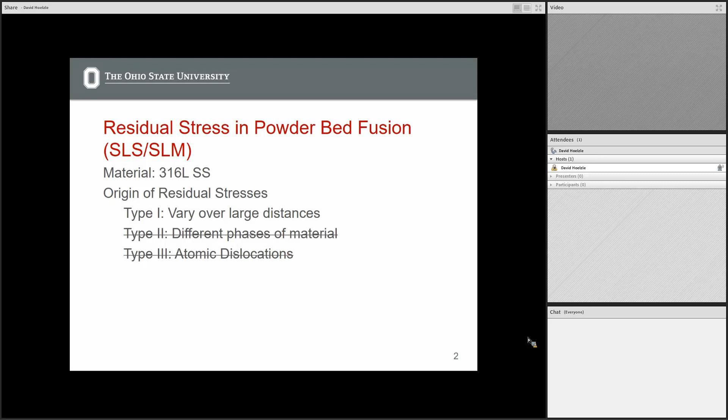So residual stress in relation to your final part—you're going to get a deformation from your intended shape, which is definitely an issue if you're going for a near net shape or net shape process, and you're expecting that your part is going to meet a certain amount of tolerances when it's actually done printing.

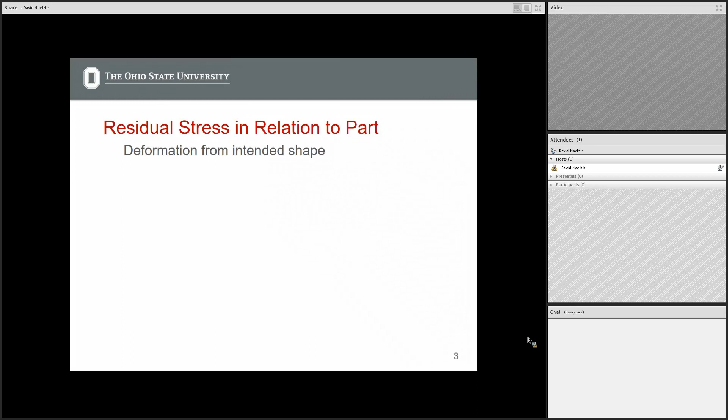And a tensile pre-stress can actually add to the external loading stress on a part itself, which will reduce its strength and also favors crack propagation if a crack were to form when you loaded your part.

They did bring up examples about how this pre-stressing can be used to actually change the material properties favorably for a part, in particular with ceramics and glass, but they really mainly wanted to focus on reducing this tensile pre-stress.

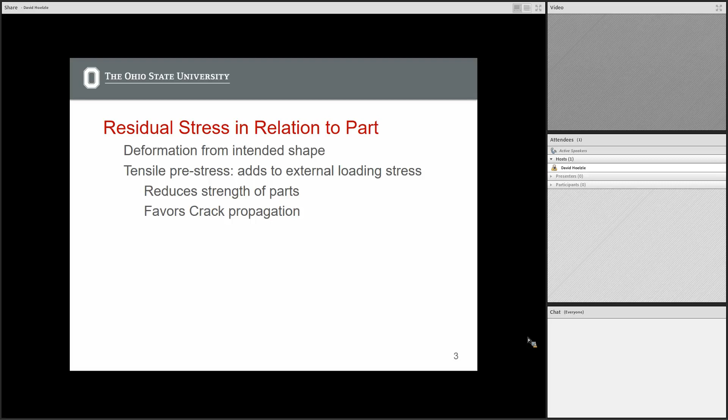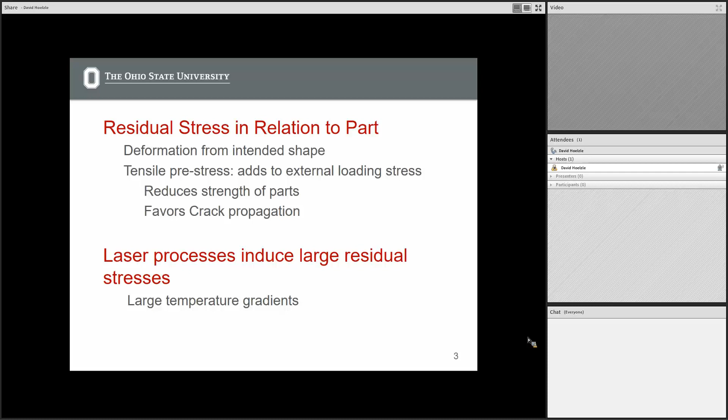So it was well known before this paper that laser processes do apply a residual stress to your part itself. In fact, these large temperature gradients were used for a process known as laser bending, which is using the laser to actually bend sheet metal to a required shape.

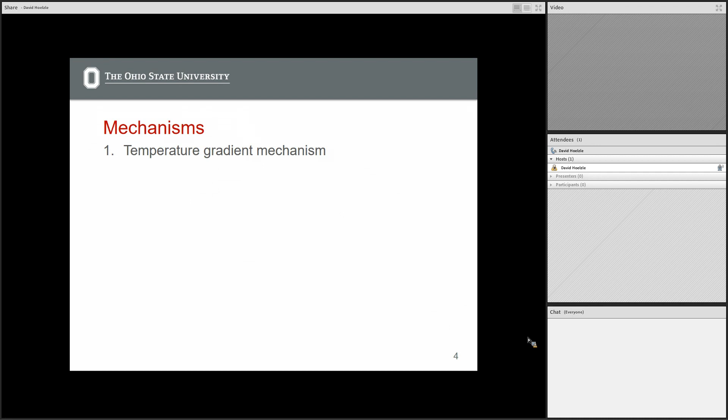So the mechanisms that they talk about that actually apply this pre-stress—there were two. We have the temperature gradient mechanism, which they describe using this figure here. The way this mechanism works is that a large thermal gradient begins to develop around the laser as you have a lot of energy heating the surface, but relatively slow conduction of heat through the part. So that's going to cause a decrease in strength of the part in that area.

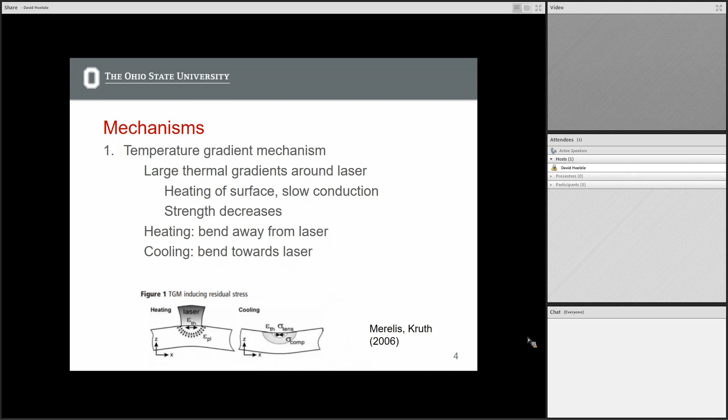So when you're heating, you're going to get a bend away from the laser, and then once that material begins to cool, once you remove the laser source, you're going to begin to get a bend towards the laser direction. However, the main one they wanted to focus on in their theoretical model was the cool down phase of the molten top layers.

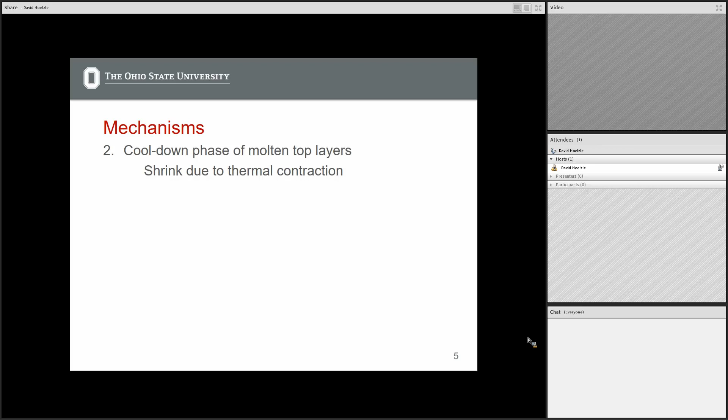So what that ended up meaning was the molten top layer wants to shrink due to thermal contraction. However, it's going to be inhibited by the underlying material that it's fused to that isn't molten.

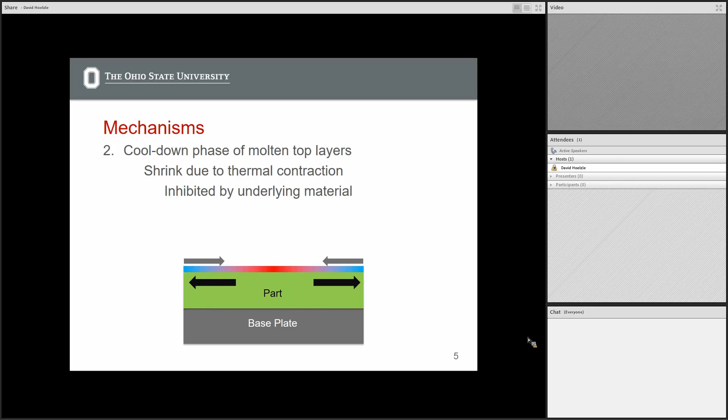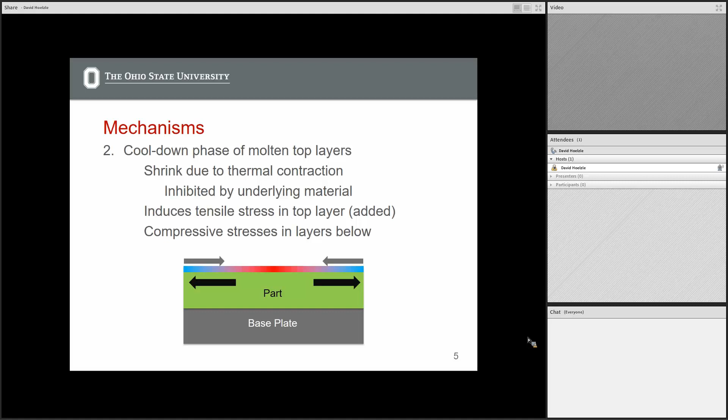So a visual to help explain this: if we have our base plate and our part that we've already built up here, we're going to add a molten top layer to this part. As it begins to cool, it's going to want to thermally contract. However, because it's fused to that part below, it's going to be unable to do so. And this is going to induce a tensile stress in that top layer, while also applying a compressive stress to the layers below. Now this is going to be important to explain a figure a little later on.

So the model that they ended up building had a few assumptions and a few definitions for their mathematical equations. First, we are concerned with the base plate height, for reasons that I'll go into in a little bit. We also need to be concerned with the part height and our layer height that we're going to be adding.

We're going to assume that the base plate and the part are both at room temperature, and that the upper layer induces this thermal stress due to shrinkage, equal to the yield stress of the material. We're also going to say that the stress we're concerned with is independent of the thickness, or the y direction, of our part.

So we're going to be concerned with a 2D model that has coordinates in the z direction, which is the build direction, and the x direction, which is along the length of the part. We're going to assume that general beam theory is valid, and there's going to be no external forces on the part and base plate combination.

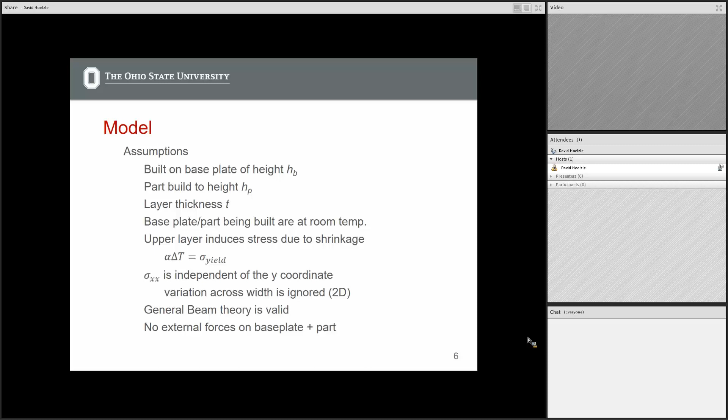So the model was constructed using a force balance equation and a moment balance equation. They also applied a continuity of deformation between the base plate and the part itself, using the strain equation AZ plus B. It wasn't explicitly stated, but based on how they go from these equations to their final model equations, we're also going to be applying Hooke's law, stress equals Young's modulus multiplied by strain.

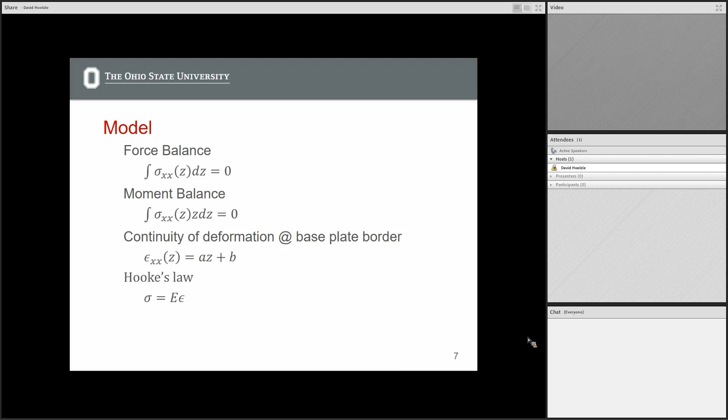Taking a look at what happens at that interface, we're going to have the same deformation of the base plate and the part itself. However, those two materials have different stiffnesses, so they're going to develop different stresses. We can define a ratio M here, which compares the stiffness of the base plate and the part itself.

Applying Hooke's equation and the strain equation we just showed, we end up getting our force and moment equations to look like this, where we have an integral across the base plate, an integral across the part, and then an integral across that top layer.

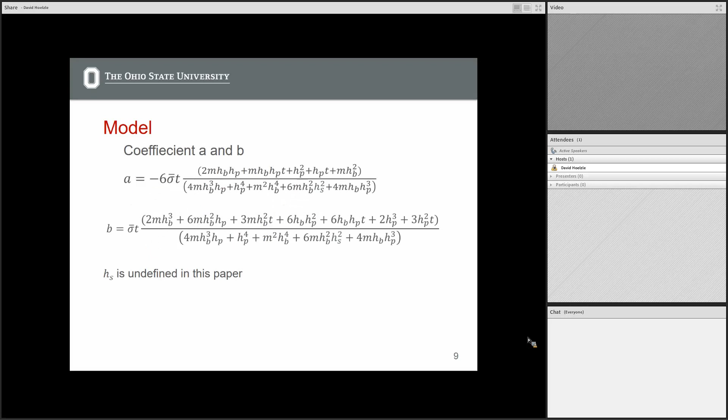That's good if we're only concerned with the residual stress that builds up if we keep our part attached to our base plate for an infinite amount of time. But we're more interested in what that part's going to be after we actually remove it from the base plate. To do so, we take a look at this relaxation stress, now in a new coordinate frame, Z prime, which is related to the height of the part after base plate removal using a wire EDM process.

We're going to have a constant shrinkage of the part due to thermal shrinkage, uniform across the part. Does everyone know what wire EDM is? It looks like you're a little fuzzy on it.

Basically, it's an electrochemical way of removing material, or separating the part from the base plate, without inducing or relieving stress in the part. If you were to remove the part by, say, a bandsaw, the vibrations of the bandsaw can actually relieve stress in the part, and therefore the measurement you did afterwards would be fictitious compared to what actually was in the part. So it's essentially seen as a zero stress way to remove material.

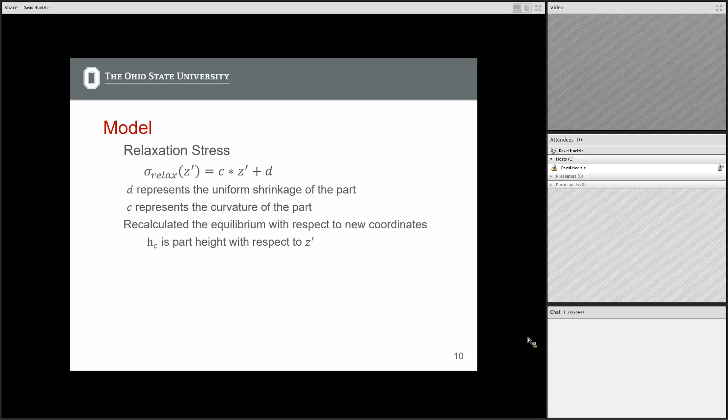That's going to be important for the method they use to experimentally test the residual stress built up across the part thickness. Going back to the relaxation stress model, we're going to have a uniform shrinkage of the part and also a deformation or curvature of the part itself. We can solve those two parameters using this equation, which goes back to the force and moment balance.

Getting into their actual model results, they began with 50 layers and a base plate of 20 millimeters. That's going to be important because they vary the base plate thickness in some of their results, which affects the residual stress. Their base plate was stiffer than the actual part material they were printing. They used a layer of 50 micrometers, and the sigma yield, important for the graphs, is 300 megapascals.

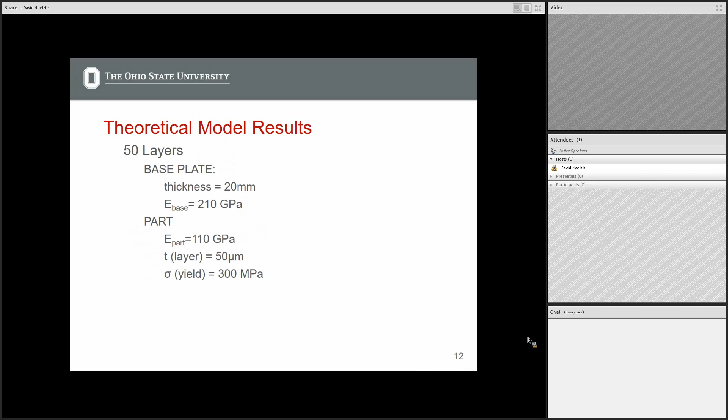So just to help orient you to the figures that we're going to be showing, if we print a material layer on this base plate, we're going to get a compressive stress in the top layer of that base plate and a tensile stress towards the bottom of that base plate.

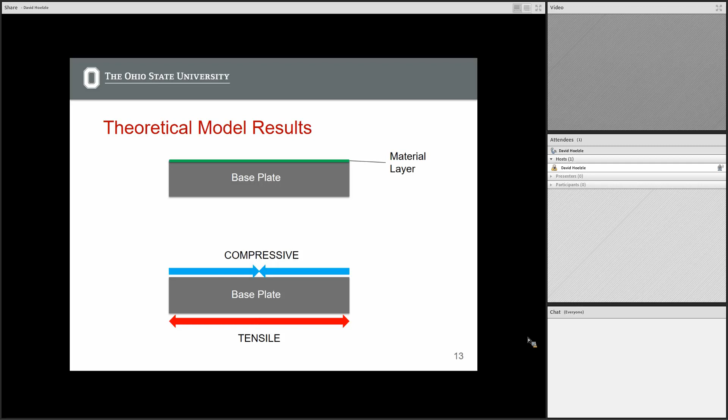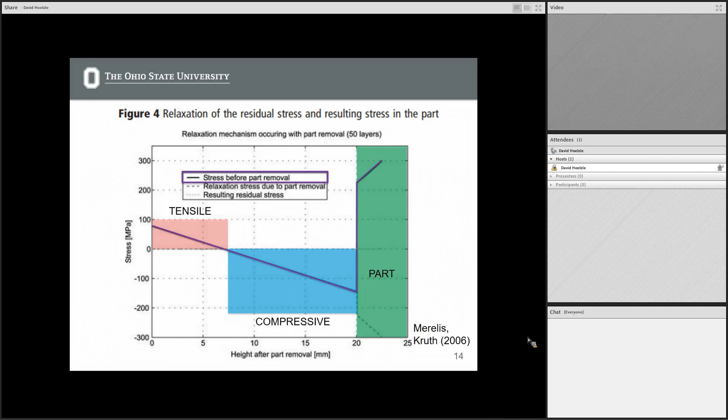So we have our tensile stress zone that we just showed with that figure before. Here, our compressive stress zone, and this is the stress going from the bottom of the base plate all the way up through the top of the part. One important thing to note here is that this is our yield stress, through that assumption that we applied at the very beginning that the uniform shrinkage is going to cause yield stress in the top layer of the part.

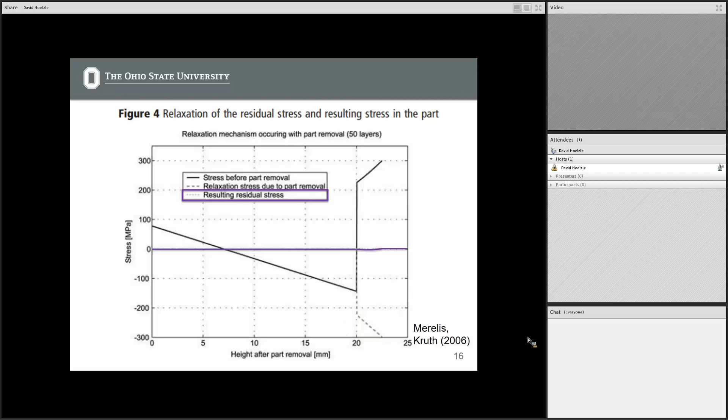So then this is our relaxation mechanism that we just showed the equation for. We're going to have our uniform shrinkage and then our bending. And then this is going to be the resulting stress after we actually cut the part off of the base plate itself. Now this looks like a pretty much horizontal line. I tried to highlight that little tiny dip right there. But blowing that up, this is what that's going to look like.

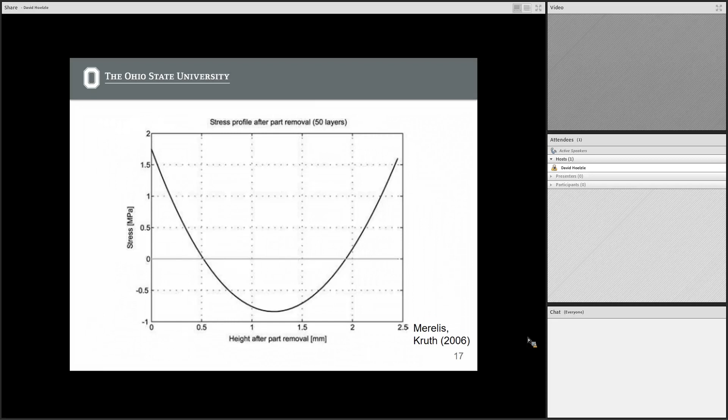You can see that we get a really big decrease in overall residual stress from the part being on the base plate itself. And we get two distinct zones at either end of the part of tensile stress, and in the middle we have a broader compressive stress zone. Also, the endpoints aren't actually at the exact same stress level. The maximum stress comes at the section of the part that's towards the base plate itself.

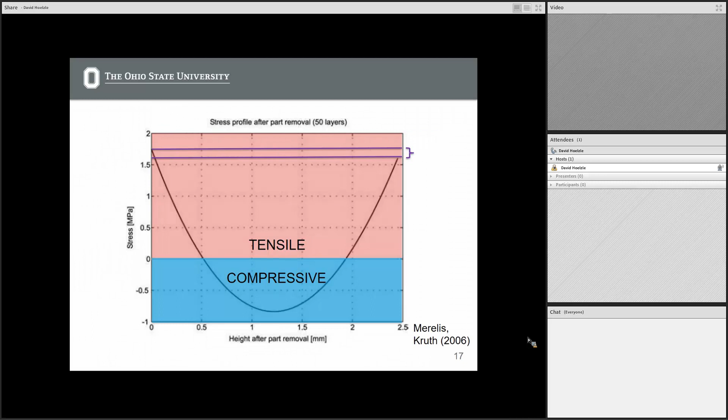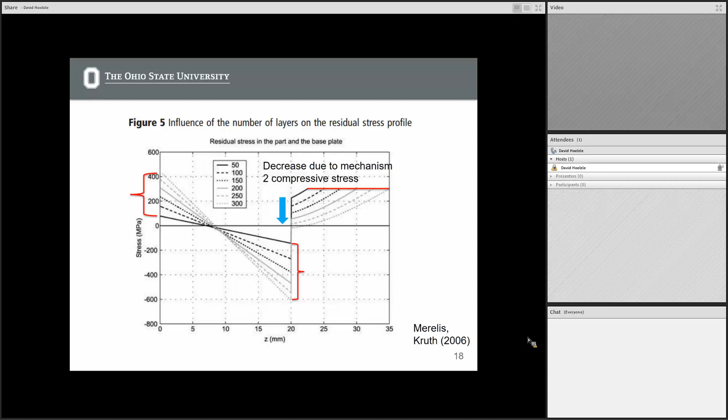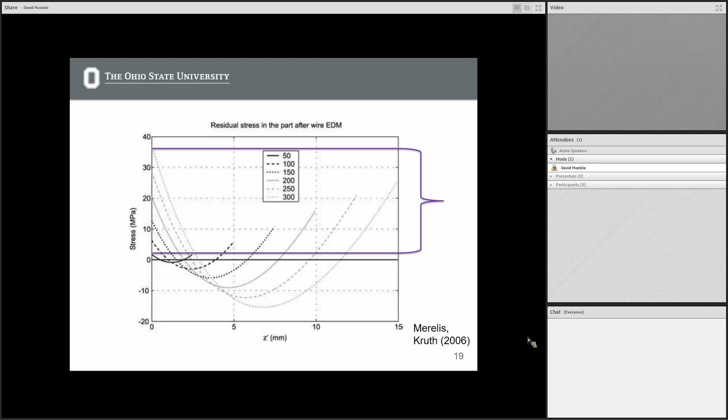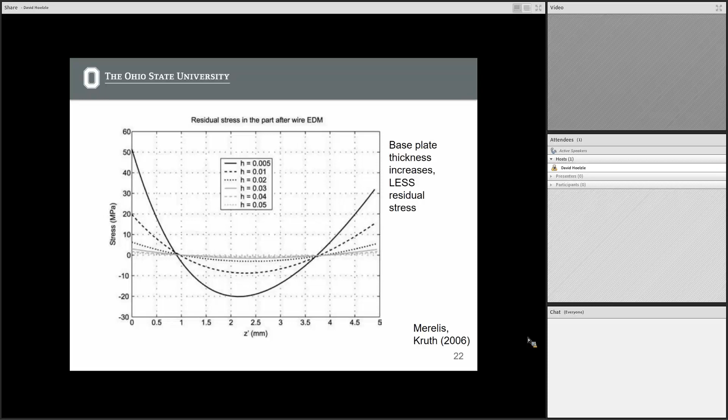So that was all the theoretical section of the paper. Then they took what they learned and wanted to compare it to actual 3D printed parts. The way they did that is using something known as the crack compliance method. I'm not going to go into the mathematics behind it, just for brevity, but I can if anybody's interested.

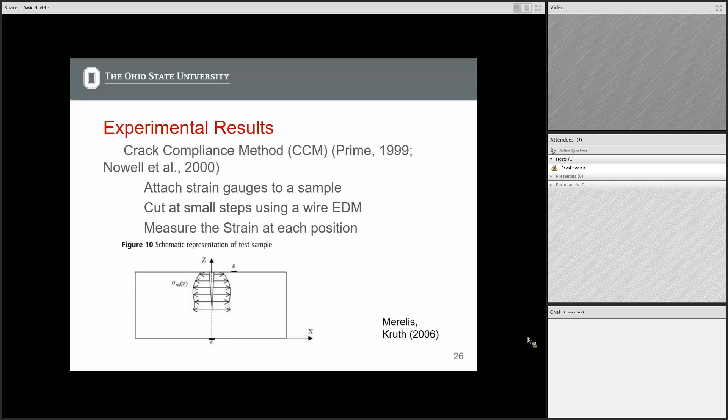The main idea of this method is that by attaching a strain gauge to a sample, you're able to cut the sample, which has a pre-stress in it, using a wire EDM process at very specific depths. Then by measuring the strain, you can backtrack and get the residual stresses built up throughout that part.

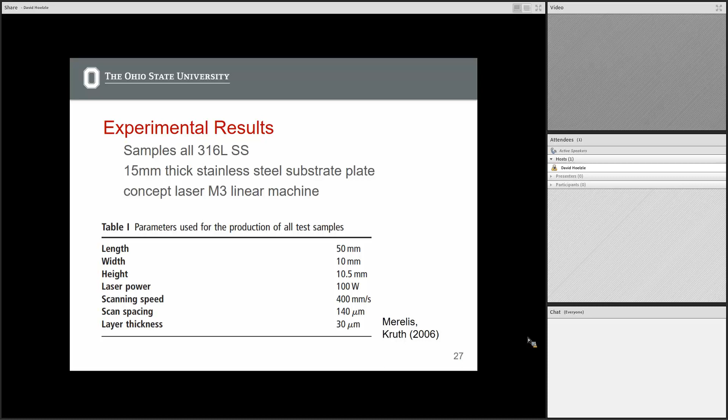Their experiment was still with 316L stainless steel, so they could compare it to their theoretical results. They were printing using a rectangular shaped component, with length 50 millimeters and width 10 millimeters, which is important for their scanning strategy, shown here.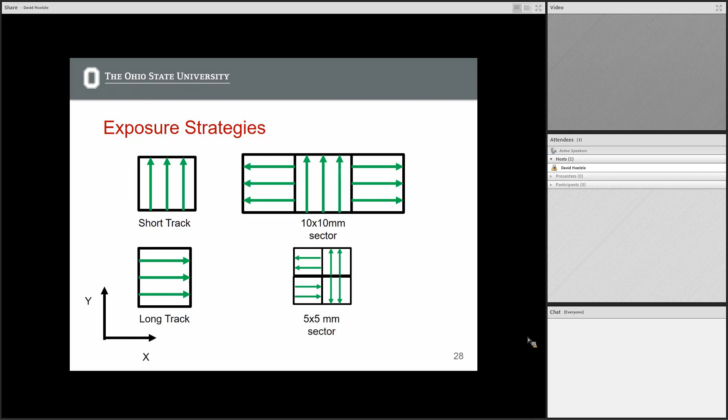Taking a look at the different scanning strategies, arranged in increasing residual stress remaining in the part, we first have the short track method, then no real difference between the different sector scanning strategies, and the long track method ended up having the least amount of residual stress built up in the part.

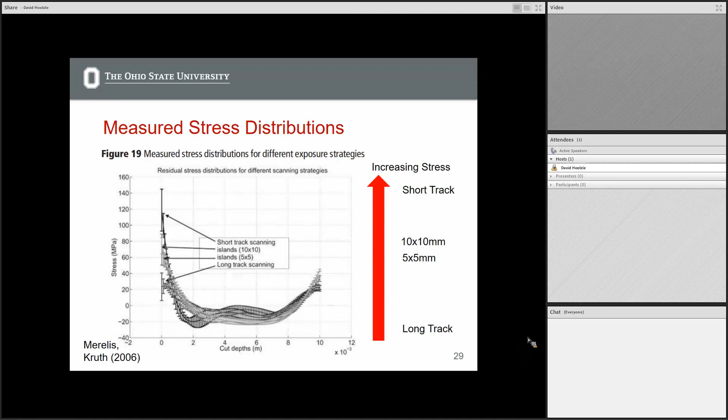Another interesting thing they took a look at briefly was post-scanning processing. The idea was: if you scan a layer, can you rescan it with the laser to somewhat anneal the part or reduce those built-up residual stresses?

They found that with no post-scanning and 100% laser power, you don't get any reduction at all. They justified this by saying that with 100% laser power, you're just remelting the material and still getting the same buildup and thermal shrinkage, which applies the same residual stress.

However, with 50% laser power, they did see a reduction in the maximum residual stress in the part. This paper was from 2006, so there may be more research on in-process annealing since then. They ended it saying more research needs to be done to understand optimization methods for doing this with actual commercial methods.

The last main takeaway here was this graph. Some issues: if I go back, you see really large error bars right around the surface of the part, which may be hard to see in this figure. That's due to the crack compliance method inherently—for a variety of experimental reasons, it's very difficult to get your surface residual stress using that methodology.

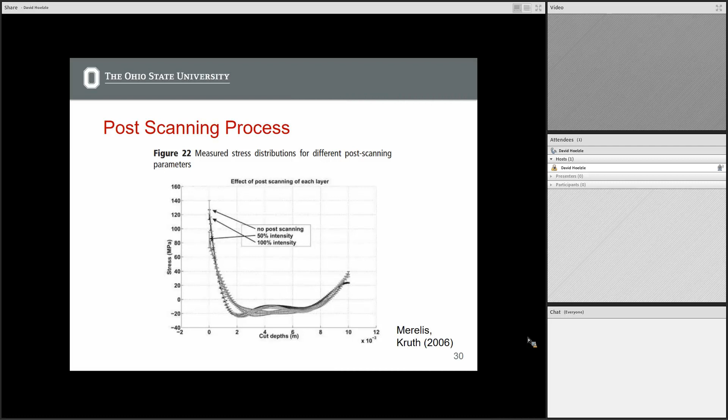Instead you can use X-ray diffraction, which accurately gets your surface residual stresses but can't penetrate deep into the part. So to show the influence of that maximum tensile stress, which is right at the surface, with different part heights, they ended up moving to X-ray diffraction.

The main takeaway here is that as you build up the part, going from 2.5 millimeters to 10 millimeters of part height, you get a really big increase in residual stress buildup. In fact, we're beginning to push the yield stress of the material itself, so we're going to get yielding just through the printing process from our intended net shape that we can't anneal out.

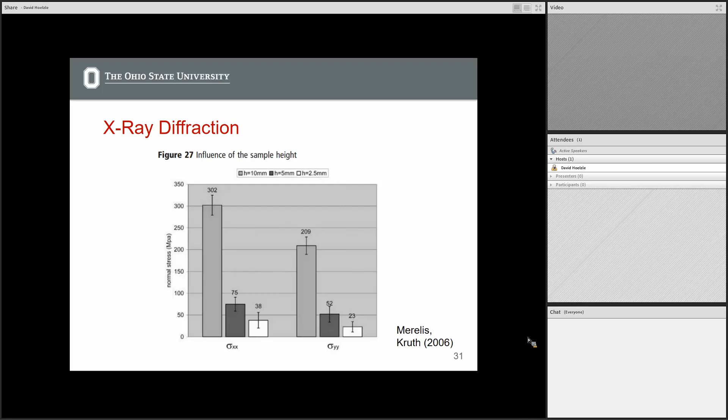So those are the main takeaways I had from the paper. I'd like to open it up now to any questions that anyone might have.

Questions for Ryan? Did they talk about how they measure those stresses from XRD? Because isn't it like a crystallographic methodology? How does that translate?

That's my question. Yeah, they go into it a little bit. I'm pretty unfamiliar with the process itself, but they do go into how they use that. Let me see if I have that graph. I do not. So they go into a little bit about how they're justifying the fact that they can use this methodology and compare it directly to their crack compliance method in the paper itself.

One of the interesting things they did was look at a part with no stress, an annealed solid block. Using this methodology, they proved it had very low stresses at the surface, close to zero within their error bars. Then they took it through a wire EDM process and saw a big increase in surface stress. So they had to use a chemical etching process to remove that wired EDM layer in order to get the actual residual stress they were looking for, without applying residual stress from the wired EDM itself.

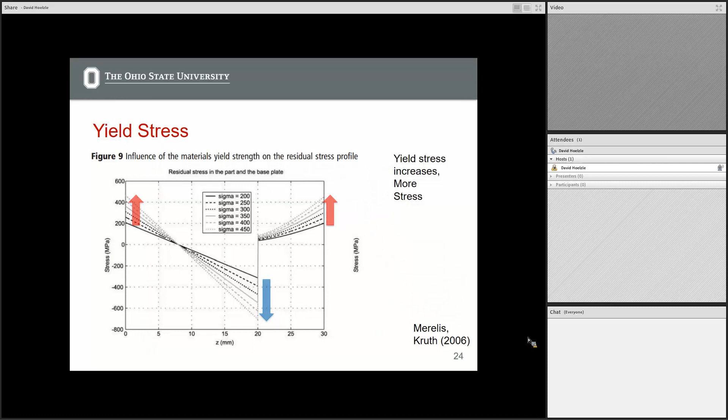Let me go back here. So the main thing is that as you increase the yield stress of the material, you're going to begin to build up more and more residual stresses in your parts. That's both during your process to print it, as well as in your part once you remove it from the build plate, based on their theoretical model.

So I think that's interesting with respect to being able to vary the build plate thickness you use, based on what you want to be printing. To me, it was surprising how many different parameters you could vary when designing your AM process to counteract some of these negative effects and reduce residual stress. It's not just that you print it, anneal it, and you have a part — there are specific things you can tune in the process itself, anything from scanning strategy to build plate thickness, to begin to mitigate some of these effects.

Right, because it would snap. It's an interesting theoretical study, but they wouldn't even be able to run that experiment at 5 millimeters. In fact, they didn't do any experimental results for this because that would require modifying your AM machine. If I were to give a rule of thumb for what's done in practice, they make the build plate as thick as they can while still being able to pull it out with human strength, without having to get cranes in there.

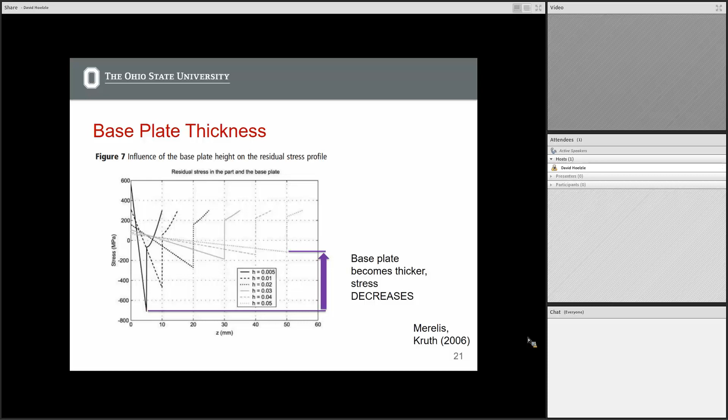One of the interesting things they talked about, that I didn't go into here, is that they're only looking at a 2D cross-section. However, the width of the base plate isn't necessarily the same as the width of your part, and in most cases it's not. That's going to have an effect on the effective stiffness of your part itself, so they talked a little bit about how you could add the widths of the base plate and the part to your ratio.

So they're essentially fudging it by changing the modulus through this ratio. So that might have something to do with it.

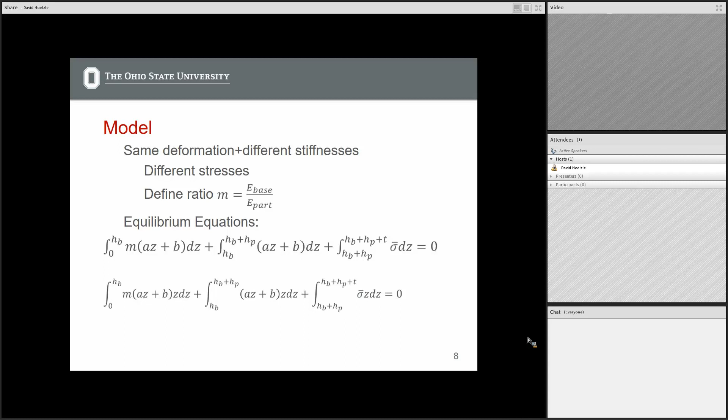Dr. Hoelzle, this might be a question more for you - you mentioned that they often make their build plate as thick as possible, while still being able to remove it with human strength. Is there an upper limit to how thick you'd ever want to make that, so you stop getting benefit? Like, 10 feet by 10 feet - would there be diminishing returns?

Yeah, there's definitely some kind of diminishing returns. They're usually somewhere on the order of 2 inches thick. The actual build size of a lot of machines is very large, around a foot by a foot. But a piece of stainless steel that's a foot by 2 inches thick is really heavy.

I'm not saying you couldn't lift it, people definitely can, but it's not something you want to do all the time. I was a little bit joking, but there's also cost associated with it, right? In design, you have to spec out the cost of metals to build stuff, and a build plate costs a few hundred dollars just by my estimation.

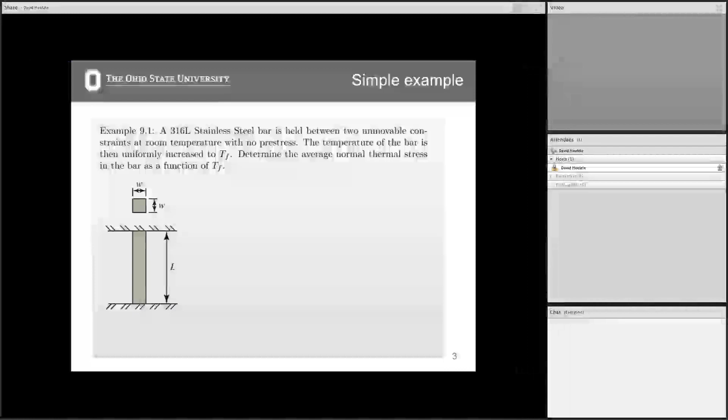So this is an example where we have a material with these dimensions you'll see in a second - L and the cross section won't actually matter, but we'll show why those drop out. The example here is 316L stainless steel - we're saying nothing about how this was made, choose your favorite manufacturing process. It's held between two unmovable constraints at room temperature with no pre-stress in it to begin with.

Then you're going to say that the temperature of the bar, by some sort of heating mechanism, is uniformly increased to TF. We're going to assume this happens slowly, with no shock in the material. So determine the average normal thermal stress in the bar as a function of TF.

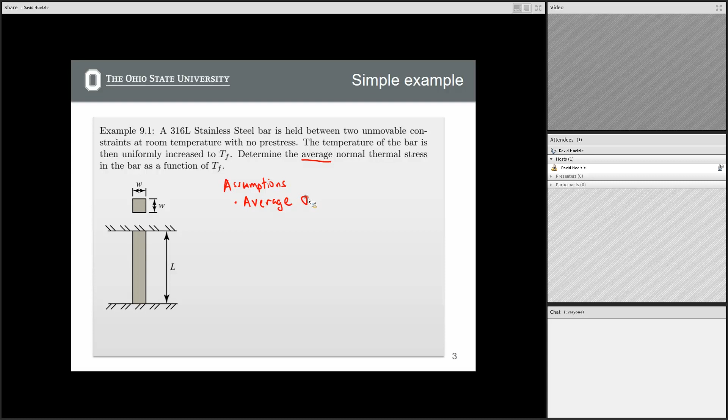Okay, so some assumptions here. We're looking at the average stress - that was given in the problem statement, but just to make sure that's clear. The average stress - we're not talking about what happens at possible stress concentrators. So average stress, sigma.

And that this stress never exceeds yield stress. So we're going to raise the temperature to TF, and keep raising it until we hit the yield stress, and see where that happens in terms of temperature. Once we hit the yield stress, we have to look at plastic deformations and things of that nature, which gets a little messier with the equations.

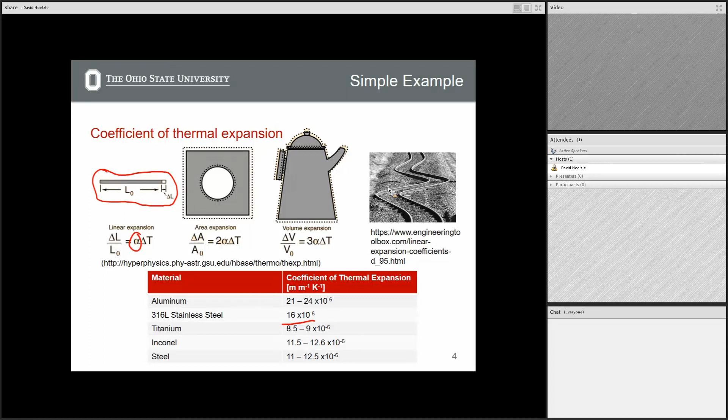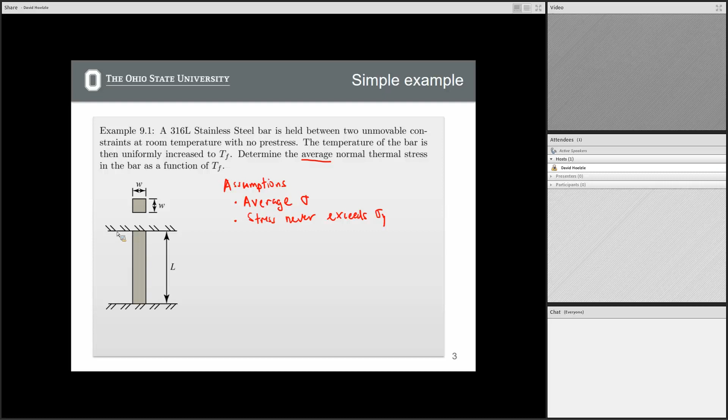Going back to our question, we're going to compute the stress as a function of temperature. So what we get is this scenario: let's assume we removed that top wall. We have this constrained part, or the ceiling. Say we remove the ceiling of this part, and then we have this scenario.

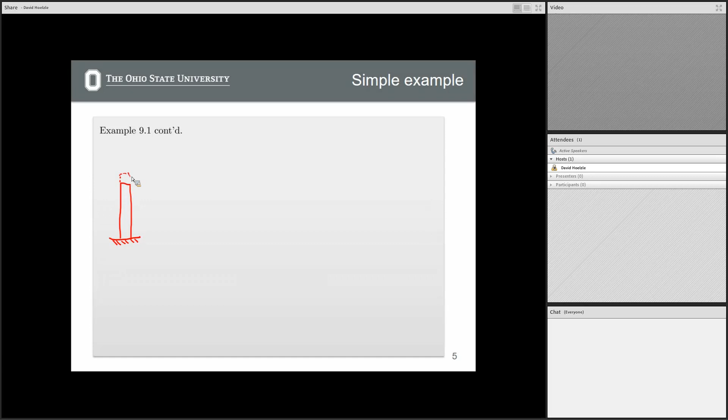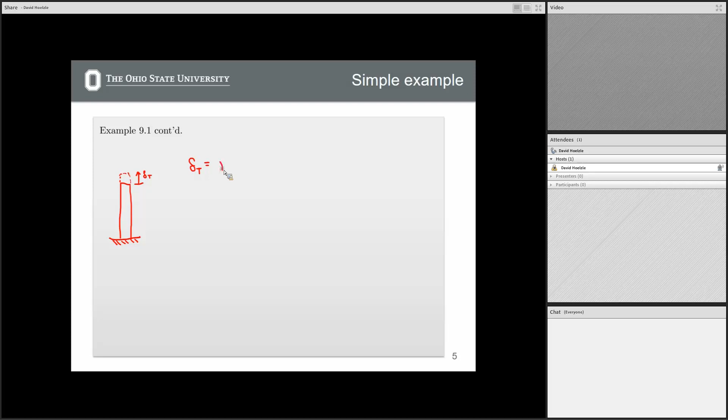So we have our bar, we heat it up, and then we're going to get some sort of thermal distortion we'll call delta T. So delta T would be equal, given our equations, to alpha delta temperature times L.

But we do have a wall or a ceiling at the top. So then we can look at what would be the force required to take this bar and actually move it back down to this position. This is going to be a delta force—basically balancing these deflections. So we have delta F, and these are established relationships, that delta F is equal to force times length over area times the Young's modulus. Keep in mind, with typical normal compressive stress, force over area is stress.

So if we want this system to be in equilibrium, we have to have delta T minus delta F equal to 0. Putting these equal to each other, we get alpha delta T L minus sigma L over E equals 0. The L's cancel out, and so I get sigma is equal to alpha delta T times the Young's modulus for this material.

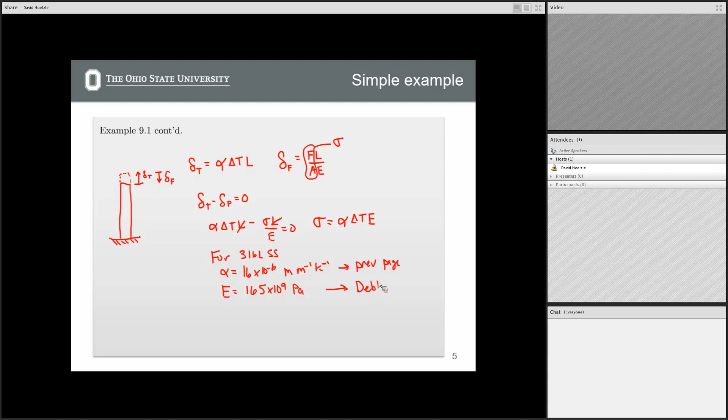So then we can now find a relationship for stress as a function of a change in temperature, delta T.

Keep in mind, this is from the Debroy paper as well, that the yield stress for 316L stainless steel is equal to 435 times 10 to the 6 pascals. So I can look at these and say, what can the temperature difference be before I start to yield this material? These are both 10 to the 6. Somewhere around or a little less than 200 degrees centigrade or Kelvin, which, compared to the temperatures we're using with additive manufacturing processes, is really not that high. That's a pretty small temperature.

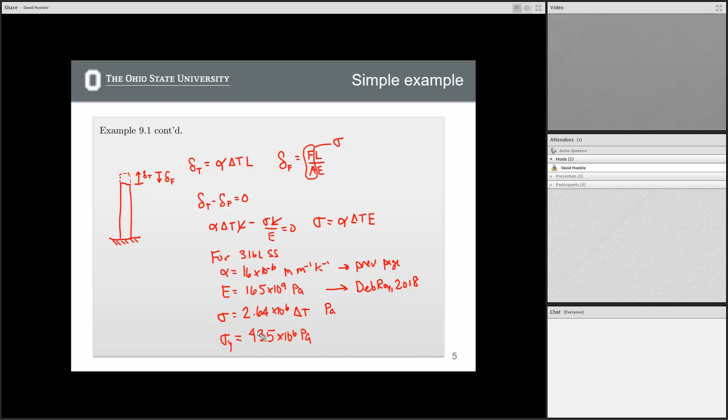So we can plot this—here would be showing a linear change in the stress. We said this is the range we care about: this model is approximately valid for temperatures such that the stress is below the yield stress. Above this, other things that are more complicated happen. But we can see somewhere in the order of 170, maybe a little over 160 degrees centigrade or Kelvin, we get material that goes above the yield stress. That's the main point of this exercise, to show that it really doesn't take all that much temperature gradient to get a material to yield with these types of processes.

In this example, it's independent of length, but that's the main point here. So it's pretty safe to assume, and there's a lot of evidence showing this, that we're always going to get material yielding when we talk about additive manufacturing of these types of materials. That's the main point of this simple example. Any questions on this simple example?

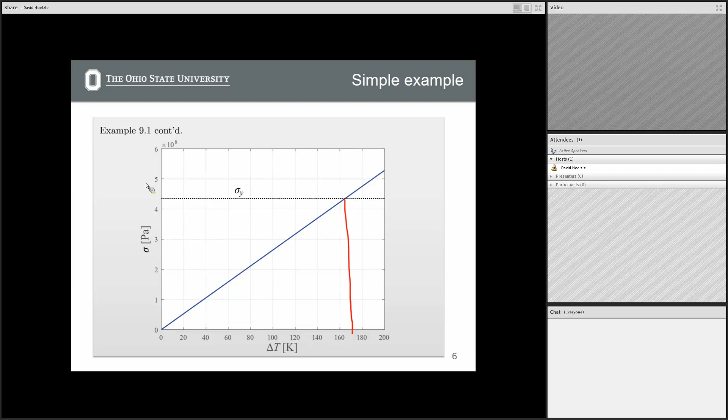Of course our parts don't look like simple beams like this, they're a bit more complicated. So I thought it may be helpful to go through a case example, a fairly similar paper to the one Ryan just presented. This is work I was part of when I used to be a professor at Notre Dame, a 2-year project looking at residual stress and deformation in parts printed by laser powder bed fusion, using an EOS system for 316L stainless steel and aluminum printing. I thought it'd be good to go through some results before we get into the physics.

This is a case study. The paper Ryan just presented used essentially rectangles, a 2-dimensional material. We're using an even simpler shape, a disc. The reason is we can quantify deformation by a single parameter, essentially the radius of curvature of the disc as we print. So what happens when we say we want to print this disc? This is ideally what we want to print.

We print it, and what ends up happening is that on the build plate you have a ton of residual stress built up into the material, and when you release it from the build plate, it folds up into like a bowl, what we call a potato chip, essentially. If you had it on your desk you might slightly see that it's folded into that potato chip shape, but with a coordinate measurement machine or something more sophisticated used in an engineering environment, you can definitely measure this potato chip effect and bowling up of the part.

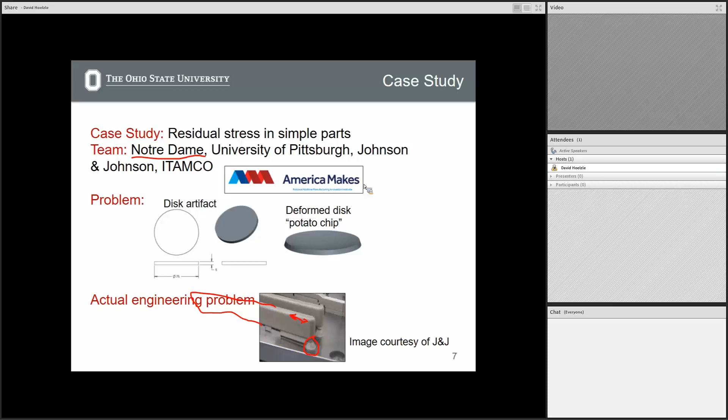So this is basically what Ryan was talking about before. We were looking at trying to understand this, as opposed to them looking at more continuum mechanics in that paper Ryan just presented. We were using finite elements to try and understand this.

But the main idea here is exactly as Ryan said. One detail that the paper didn't go into is what is the state of stress in the melt pool. And it's pretty safe to assume that the state of stress in the melt pool, relative to the state of stress in the solid material, is zero.

You can think of this as if you were to take your finger and put it through the melt pool. I wouldn't recommend it, but it would essentially have no stress built up in terms of the resistance you get if you try to put your finger through a piece of metal. So very, very different — essentially zero stress in the melt pool, and then as soon as it starts to freeze, you have stress accumulation.

So what you're getting is you heat up this build plate, creating a melt pool directly under it. You're getting very intense temperatures just below the melting temperature of that part or material. That's causing thermal expansion. Then this material on top freezes, and when it freezes it's essentially at the melting temperature, and then everything cools down, causing thermal contraction.

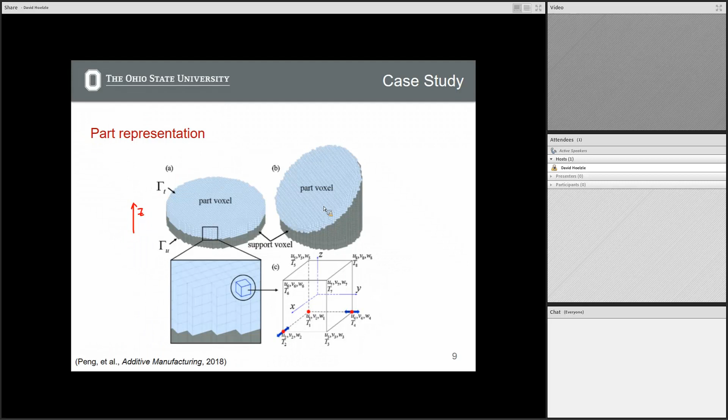So this is for our models, and then here's the experiment that was done. This is a fairly extensive experiment, this took a lot of time, I would say.

I'm looking forward to your projects too. Remember, I said assume that you have essentially infinite resources, right? Not infinite - you can't say I'm going to do design of experiments of the entire possible set of additive manufacturing treatments, but assume you have a lot of money to play with, that you can hire technicians, etc., to run a lot of parts.

So we looked at, I don't know the exact number of samples we actually printed, but it's quite a few - close to 100 parts that we printed for this study.

And so then each of these were also characterized, which takes a lot of time. This was essentially a graduate student and a postdoc, about a year and a half of their life, making samples and characterizing them, somewhere in that range - they were doing other things too, but yes, Prasad.

Why such a huge variation? Is there a reason why you're focusing on this?

Yeah, so our primary sample was this 45 millimeter diameter, 5 millimeter thickness sample, because via pilot studies we would get into the deformation range we were looking for in terms of characterization. It was where we could start to pick it up in the CMM, but we weren't getting so far out of some basic beam bending and linear analyses. We didn't want something that would pull up like this.

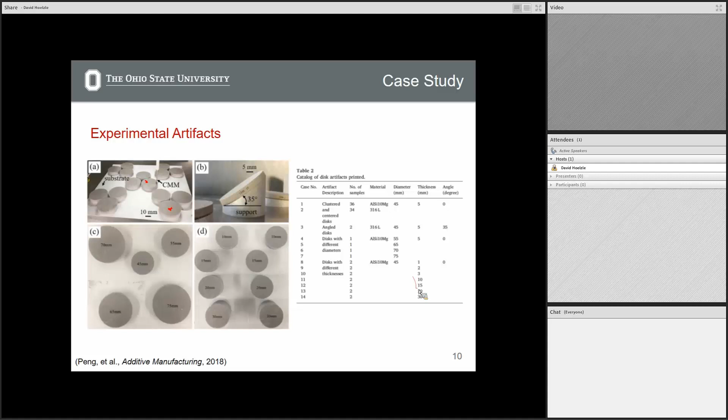What we did in terms of characterizing this, we have two main ways. One is a coordinate measurement machine. Has anyone used one before? Nate, you have? Okay, so a coordinate measurement machine, you can see the stylus touching the part, but basically you have this XYZ gantry system above the plate, and then it's basically a robot that will go along and scan the surface of this part.

It has a little touch probe, so it knows when it hits the part, and then you get the topography of the part via this measurement machine. It's pretty automated, so you just kind of let it go. It's a pretty quick way to understand the surface topography, and then from there we could characterize and take that set of data.

Here's the type of data you would get off of it. This is just a heat map. The blues are lower, the oranges and yellows are higher, so you can see that it's bowing up like we said it was going to. And then from there you can fit all this data to what we call a radius of curvature.

This gives us a single number, a metric of distortion. So basically as ROC goes up, distortion goes down, and vice versa. If we have a very small ROC, that means this fits a very small sphere, so therefore it has a lot of distortion in the part.

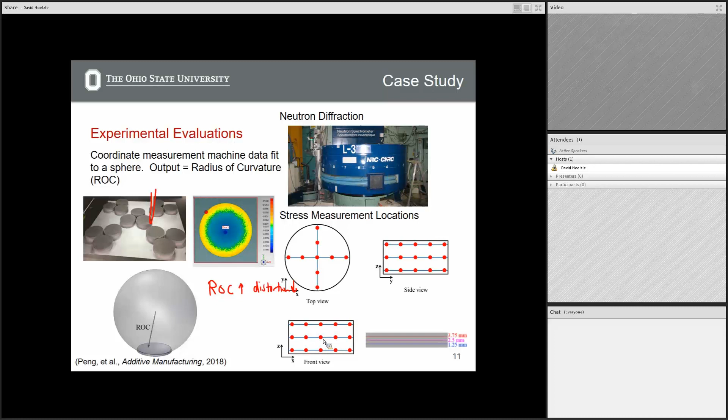I'll go through stainless steel in a second. Nothing too fundamentally different, but the main message here is that when it's on the substrate, you get very little, almost imperceptible deformation because it's being rigidly fixed to the substrate. When we release it, you get a pretty large deformation, essentially the effect of it popping off, and now it bows up. So when it's on the substrate, it's pretty flat with minimal distortion, and you have the ability to relieve this residual stress via

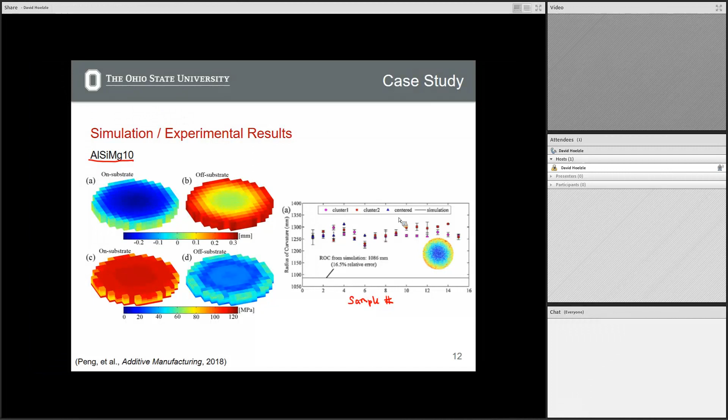Okay, looking at this radius of curvature as we vary other parameters. So these were just like a bulk test, basically testing a bunch of the same thing over and over again to try to understand what's the variability in this process. Seeing that there's fairly little variability.

And then this is looking at single prints, now varying different factors here. So this is as we vary the diameter. We hold constant the 5 millimeter height of that disc, and now we vary the diameter. This is what we tested a bunch of right here. And then this is our different treatments for aluminum, showing pretty good correspondence here.

And then this is varying the thickness. So when you start to get very, very thin samples, you have to take into mind what the aspect ratio here is. This is a 1 millimeter thick disc that's 45 millimeters in diameter. It's basically a really wide washer.

And we would see in the CMM that we're starting to get buckling in these types of parts. This is getting some sort of asymmetry in the deformation behavior, which wasn't explained by our model. So this is a region in which our model doesn't seem to work so well. But the radius of curvature is really, really small here. This is a pretty extreme deformation that we're getting when we make very, very thin parts that have a really wide diameter to them.

So like I said before, the worst thing you can do with additive manufacturing systems right now is you make something that's really long in one direction and very short in the other direction. And that's exactly what we're doing here. We're making a very short part that's very long. In comparison, it's creating a lot of deformation in terms of the radius of curvature going way down here.

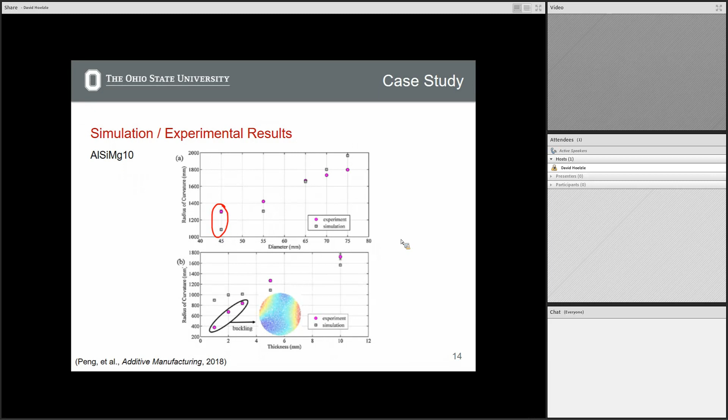Okay, residual stress measurements. This is where maybe our experiments and our model were, I would say, qualitatively the same, but had a decent amount of quantitative difference.

This is simulation, so the open symbols are simulation, and the filled ones are actual measurements we took off this neutron diffraction machine. So the main message here is that you get stress profiles that somewhat qualitatively match what you would expect. The blues essentially match the blues, the reds somewhat match the reds, and the pinks somewhat match the pinks here.

The other thing is that the stress in the Z component is really, really small. This would be stress in terms of individual voxels being stressed along the length of where you're printing, small. In the X and Y direction, quite large here.

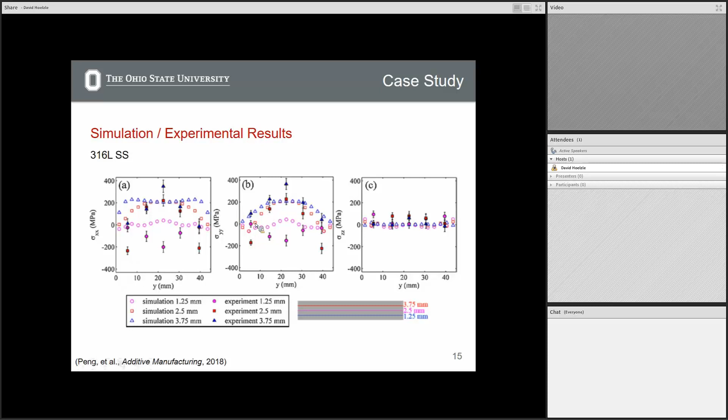Okay, and then we also did some things going back to module 8, just to tie this all together. These are looking at grain structures in the parts.

So this is the Z direction, this just shows you individual grains. Z direction is our build direction. This is then the top down view, looking at the top down. So we said before that the main structure you're going to get here are these columnar grains, kind of stacked like this. And that's essentially what we're getting.

So this is probably one of the least interesting results we got in the study, because this basically matches what everyone else reports, which just demonstrates that this is in compliance with everyone else's results. So this is showing primarily these long, elongated grain structures in this direction. If you look from the top down, you see the top of these grains.

You can also start to pick out where the melt pools are and correspond. You can actually match this to images of where these melt pools are. These are the overlapping melt pools you see here. Again, this shows that some of the grains even pass through melt pools.

And then this is the same exact experiment, but for the characterization run with the stainless steel part, showing very similar behavior as well.

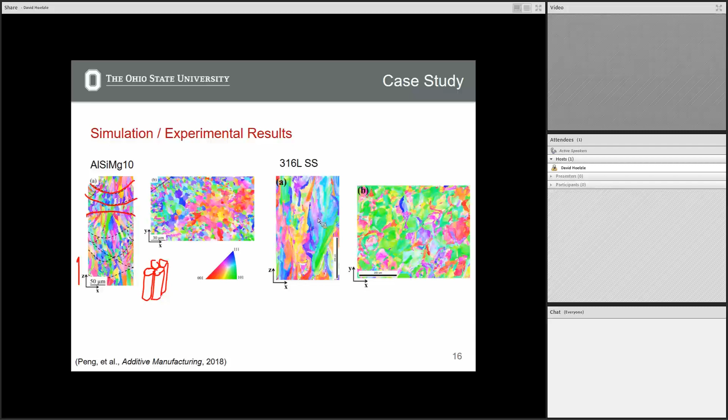Okay, all right, so this is, I guess, more of a scientific study. And then the question is, where can this potentially be used?

So how we've used this information, I kind of glossed over it at the beginning, but if you look at our models for residual stress buildup, this temperature profile, we were investigating very efficient ways to try and get this temperature profile. We were also looking at quasi-static analysis, assuming that this material is freezing into place at only distinct periods in time. That's a much more computationally tractable way of understanding and characterizing these deformations than doing a full spatial temporal finite element mesh.

So the full spatial temporal finite element mesh, if you want to do this for the part, it's going to take you multiple days. We were able to, by making some simplifying assumptions, get answers on the order of just a few minutes, in terms of what the distortion and stress in the part would be.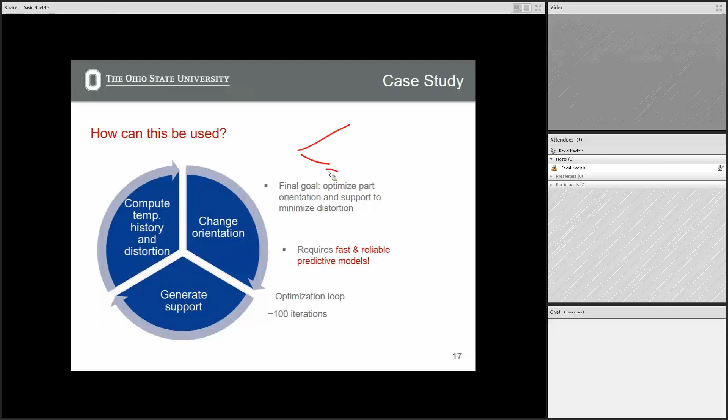So what this enables us to do, if you have a model and can get somewhat reasonable validation of that model with experiments, you can start to look at how to use this for design. And I mentioned that the worst thing you could do is basically create a part, and this is the build plate, and you have something that's long and slender, and you lay it flat in terms of distortion of this part.

So okay, if that's the worst thing you can do, what's better, right? What are your options in terms of how you orient this part? Essentially, you can rotate this part along 3 axes. You can rotate it in alpha, beta, gamma, in terms of your angles of rotation. So then the question is, what would be the optimal orientation for a random part?

And what you can do is, if you have a prediction of what the temperature history and distortion is, you can start to say, I want to make this my objective, and I want to try and minimize the distortion of this part, then continually change orientations and try to understand which one is the optimal orientation to build this part.

How this is primarily done is you have technicians who get really, really good at how to orient a part so it prints properly. But that knowledge, getting really good at it, takes quite a few months for a technician, and it's not really transferable. So we're trying to make software or computer-aided manufacturing tools to automatically choose orientations for parts that will get low distortion coming off the machine.

So you're using these loops where at first you randomly choose an orientation, generate support structure from that, and then compute the distortion. Then, given this distortion, you can change the orientation. We were using a somewhat random way of going around the entire 3-dimensional angle space, continually looping until we converge to some orientation that is optimal with respect to an objective function that weights distortion. This would take somewhere on the order of 100 iterations, going through all the possible angles.

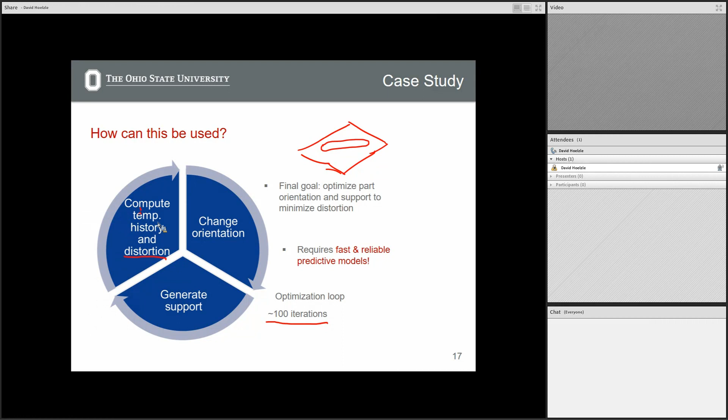So how can we use this? Here's an example of a part - I passed this around earlier in the class. This isn't actually the exact part that was passed around; this one printed without defects at all, whereas there was a small defect on the base of the one I handed around. But what we found here is that this was what the algorithm determined to be optimal.

What it's doing is taking a pretty long, slender part - I'll show examples where this fails in the next slide - and it's reducing the cross-sectional area of any given layer. We know the residual stress will cause thermal contraction at that top layer when it cools, and that total deformation is proportional to that cross-sectional area. So this is finding an orientation with minimal cross-sectional area, and one that is minimally constrained.

We have to support the part somewhere. If you go down just a little lower to get efficient thermal transport, you have to support it the whole length, and that creates a thermal constraint holding it fixed. So actually it's better to have most of the part entirely free, as long as you don't hit some temperature limits. In this optimization we had bounds on what the temperature could be, because if you want minimal stress, you'd print this completely vertical - and that part would get really, really hot.

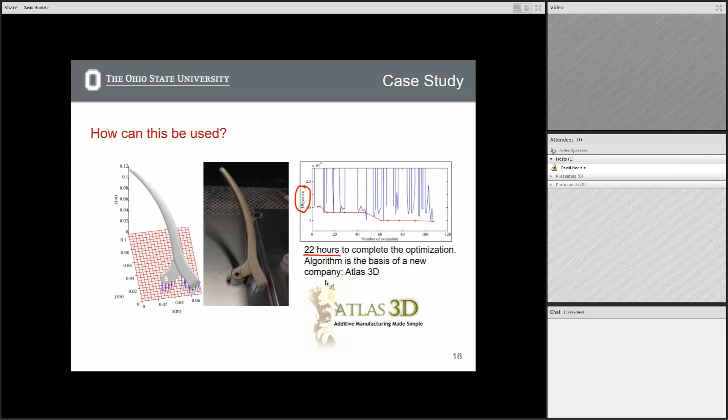So then the question is, how does this do compared to other options? At Johnson & Johnson, they had a bunch of interns that they could go and say, all right, you have to go and learn how to do this properly. And this is Danny the intern.

Danny the intern, given essentially all the resources he wanted in terms of being able to read, research, do anything, even except for talk to the technicians who are experienced with this, was able to finally get this to print. This printed without failure here. It took, I believe, 6 times to get anything to print actually. When we talk about not printing, we mean a recoater blade would distort so much that it would crash into the part and abort the part.

So this took 6 times to get, and what he had to do is actually, just like you saw on the earlier slide where they turned the support structure into solid part, he had to turn it into solid part at the edges to get this to print.

And then when you pull this off and actually remove it via wire EDM, this is the distortion profile as measured by CMM at the tip. Just to show you, this is off the page — it goes up to, actually distorts around 3.5 millimeters. That's pretty much not within any manufacturing spec. So you can imagine the amount of residual stress built up in here to get this pretty thick piece of stainless steel to distort that much.

And then this is, after we pulled off the build platform, the distortion in our part — on the order of less, I don't know exactly what this is, but it's well less than a millimeter in terms of distortion at these far regions here. Just by changing nothing but the orientation angle at which we print this part.

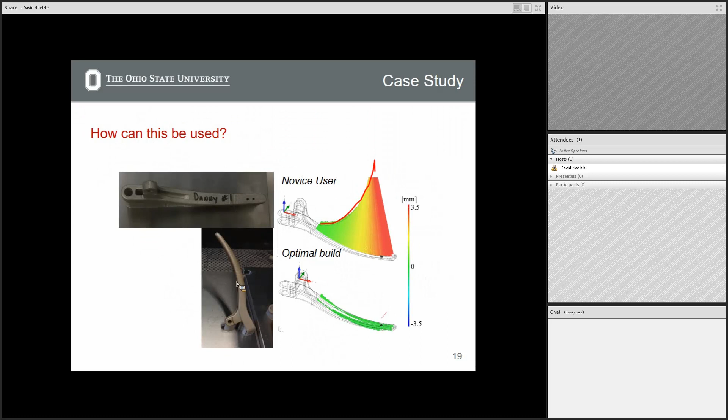Yeah, so this was no post-process annealing. We wanted to be able to print parts without having to do the extra manufacturing step, was the idea. In-process annealing, we were not looking at relaxation of residual stress, which is more of a microstructural phenomenon, right? You actually have grain boundaries realigning for that to happen. So we did not have that in there. What I would say, though, is that to make this happen quickly, we're masking a lot of what's going on at the melt pool level. Going back, this is what we were calling super layers as opposed to a single layer. So what we're doing is lumping a lot of things that would happen at very high residual stresses at the melt pool into a larger structure. And then we're saying that larger structure is freezing as opposed to all these little micro welds. So that's not really a scientific answer to your question, but we're essentially muting out a lot of the effects that need to be annealed away by making larger scale structures.

Okay. Any other questions?